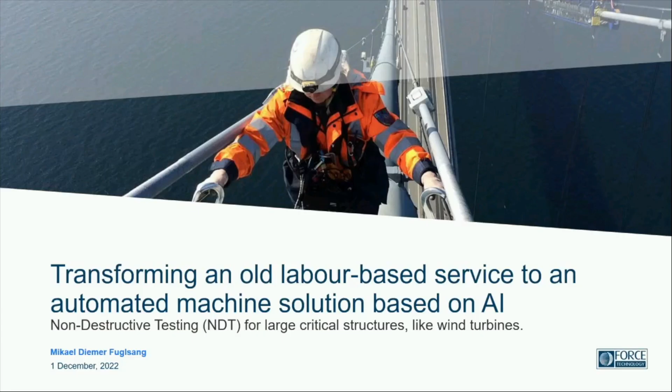I came up with this nice headline some months ago when I was asked to do a presentation about what we do at Force. The last couple of weeks when I've been looking at it, I've found out that it was quite a huge topic of transforming an old labor-based service into an automated machine solution based on AI. So I'll skip through some of it because it will be history and probably a little bit boring, and give you some examples of what we are doing. Please, if there's something that is not clear when we are done, ask a lot of questions, and I can try to answer as good as possible.

A little bit about me, Mikael Fuglsang. I'm a Master of Engineering from DTU, mechanical. I took my bachelor in what is called nanotechnology, physics and nanotechnology, and now I've been working with Force on and off for the last 10 years. First as NDT inspection, where I was head of our subsea inspections, and the last 5 years I've been working in our digital innovation, and now it's digital service because we transformed it from just innovation to service. I've just turned team lead for our robotics team at Force. Due to my background in mechanics, I'm not the one doing all the code, I'm the one making things come together and work.

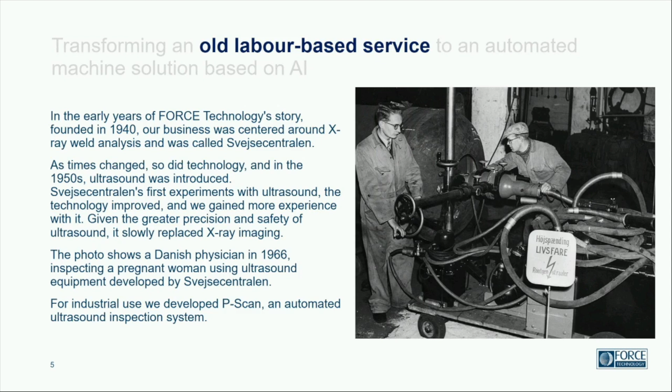So, old labor-based service, what is that? Force actually started back in the 1940s, where the first welding was introduced in Denmark, and service was based around X-ray of welds. Then in the 50s, we had ultrasonics, and in the 60s, they started using ultrasonic for, if you know, if you've been a woman, a female, pregnant, you've done ultrasonic scanning. That was kind of where it started at Force. Force technology produced equipment for Gentofte Hospital to do ultrasonic scanning, originally of pigs in slaughterhouses, but it turned out the technology was also used on women.

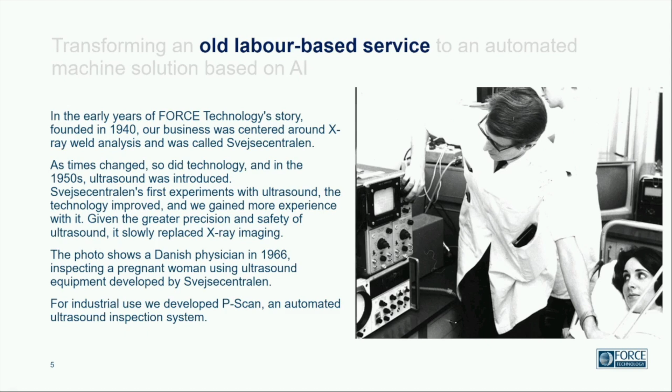And for industrial use, we have our P-scan solution. So labor-based service, ultrasonic NDT, is a labor-based service. It's a man going with ultrasonic equipment and doing an inspection. He's actually trained to do the movement on the probe at the same time as he actually looks for the signal on the screen.

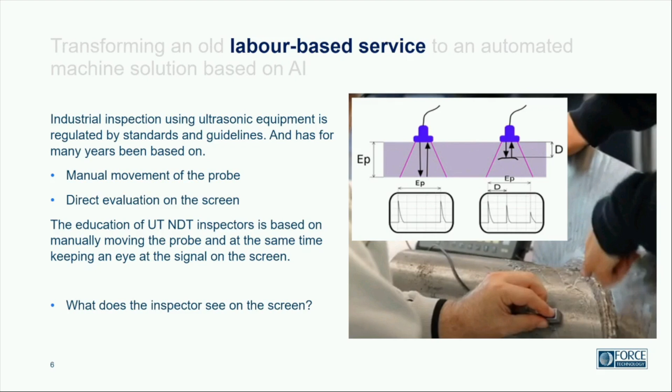So what is he looking for? He's looking for peaks in the ultrasonic response. We have ultrasound coming into the material, there's some geometry, and it reflects back. If there are occasions where you have defects in the material, you'll see a peak from that. So he's moving the probe around on the surface while he's looking at the screen, kind of cross-eyed, holding on to the little probe, moving it so that he gets a nice movement to inspect this weld all the way around while looking at the screen, seeing if there are small pop-ups.

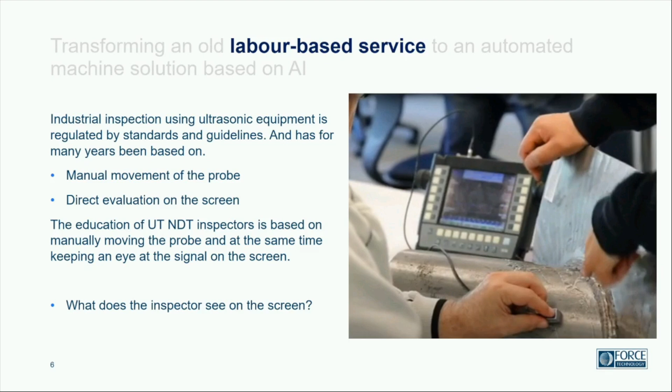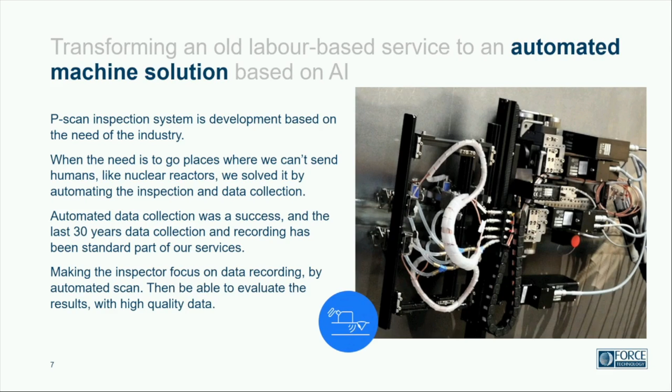But we have places where we can't send humans. So for the last 30 years we have been developing scanners and scanner solutions to send into areas where we can't send humans, for instance nuclear reactors, deep sea, underwater, places like that. This turns out to be a very, very good solution, because now we can collect data from the probes, record it, and look at the data afterwards. When we have high quality data, we can also do machine learning on it, so we can use AI to evaluate the data. Just have some examples of where we are using this.

The divers are still there to place the scanners, because this was shallow water. In other places we use ROVs, but they will dive down and put the scanner on. So they don't have to be qualified NDT inspectors to do the job. They just put the scanner on and we will control everything from the top side and evaluate the data.

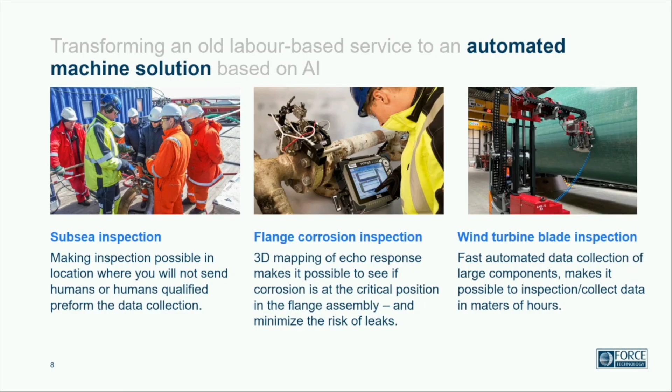And lastly, we build large scanners for wind turbine blades to make fast inspections. So we can make inspections in matter of hours instead of days. So if you are to do the new blades, which are 115 meters long, manually going around with a probe, looking at the screen, it takes days. And with this, we do it in hours. And we record the data.

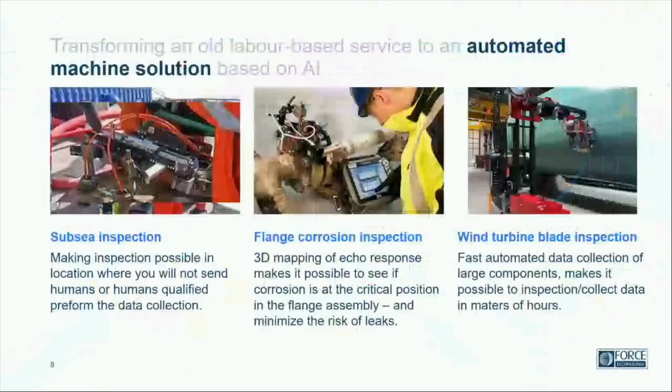So one of our big fields right now is wind energy. It's not that this can't be used anywhere else. It's just that we have a large focus for wind energy at the moment. And that's both in monitoring and in NDT.

And we have a big margin of the market of blade inspection. So almost all the big suppliers of wind turbine blades use our equipment for scanning the blades in production.

AI. So how do we define AI? Probably all of you know that we have AI, and in AI we have something called machine learning, and inside that we have deep learning. So there is a gradient of how complex is your problem.

One of the features that are very significant for a human trained to evaluate ultrasonic data, it's image recognition. They look at the image, they look at the screen, and they recognize when something is out of the ordinary. Our brain and eyes are very good at understanding the pattern that we see and seeing if something is out of the ordinary. And we have reasoning.

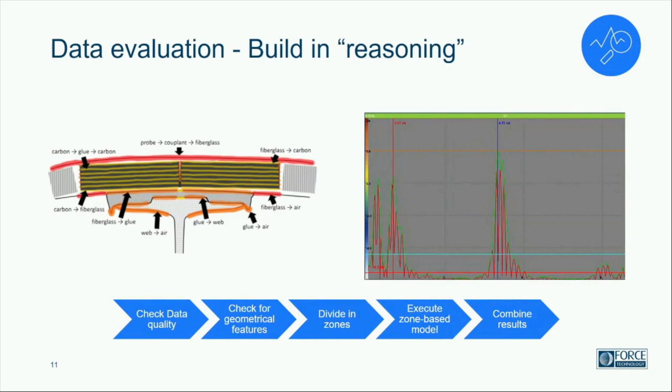We have a customer that has 6 production lines. They're using 40 NDT people to run this production line and make sure the quality of carbon profiles, the ones used in the blades, are high quality and that production is actually going as intended. They have enough orders to double their production capacity, but they can't find skilled people. So what do they do? They come to us and ask if we can help build a solution for real-time evaluation so they can continue scaling their factory.

What we did was invent this machine, and on the other side there are some ultrasonic probes, and in this cabinet is everything that is needed. Everything is boxed in because carbon fiber dust is quite critical to electronic components, so everything is IP classed.

What we found was, when we did the SAT, the site acceptance test, they wanted us to simulate, or we were supposed to get the same result as their inspectors, but we had a difference. Everything from that master coil they made for us was cut up, ground down, and destructively tested to see where we disagreed. It actually came out that their manual inspectors only found 50% of the defects. Just with the settings we found for this machine to begin with, we got 80%, and now we've fine-tuned the algorithm and we're turning out 95% of the defects.

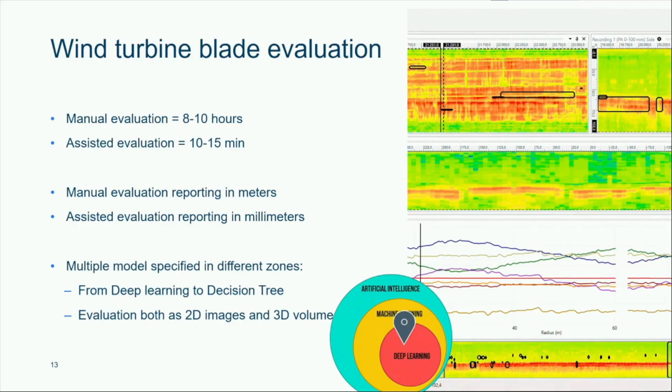And if we come a bit away from the blades, we have projects running on hybrid tests for the future. So instead of replacing the inspector they're using during data collection with a permanent mounted ultrasonic sensor, then we can do monitoring.

We can analyze the data in the cloud using AI and get automated tracking of changes over time. This can be used for corrosion or crack growth. And then we can compare the results that we are getting with our digital twin.

And we are working on accelerating the CFD and the FEA analysis by machine learning for these applications, so that we can actually not only compare the two, but actually run the model to predict when we are going to have a failure. Or we can give a time estimate on what to do to prevent the failure.

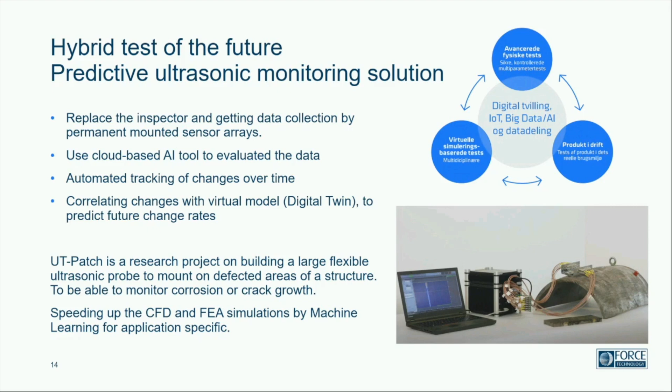Because in case of corrosion, if you have fluid moving through a pipe, it will corrode inside at some rate. But if you change the flow rate, it will erode at a different rate.

So we are using autonomous drone flights, flying in confined spaces, flying in places where you can't see the drone, for in-service inspection. Now we have the model for analyzing the ultrasonic signal and using it at the factory before the blades leave the factory.

In the future, the blades are mounted on turbines, and we want to do the same kind of inspection to make sure that the small defects in there haven't grown, and that we keep track of the condition of the blades. So drone flights, different ways of collecting data from the blades in service.

So offshore blades and things like that. We have different projects on that. We have fast ultrasonic weld inspection. We have huge metal structures that are coming up to support these turbines, both onshore but also offshore, especially the monopiles being bashed into the sea. We want to inspect the welds of those faster.

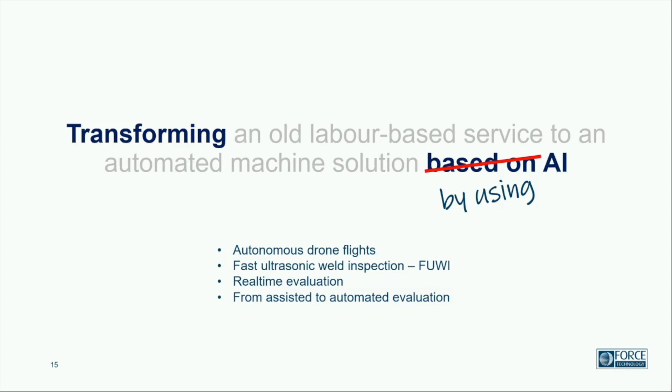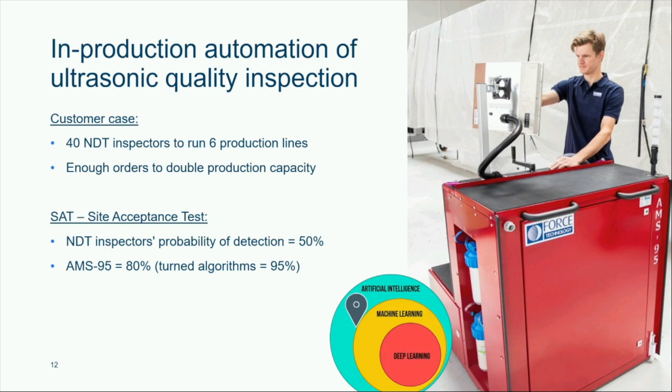Okay, thank you, so there's no yet threshold to detect and give an alarm or something. That's what we're doing in this machine. Actually, this machine has a light, a green light, and a red light that detects the data quality is low, so there's missing water or something went wrong in the production that makes the machine not collect data. And we have a yellow light that lights up every time there's a defect, so they can see it on the factory floor lighting up, and see it on the screen, sent directly to the control room. They have a control room with all 6 production lines up and running, where they can see where they have defects happening, and go adjust production parameters to mitigate.

Okay, thank you very much. I think Tim is satisfied, and after I have another question from Tiberiu Yuan. What type of neural net architecture are you using for 3D scans? What type of neural networks? Oh, that's a bit beyond my competences.

We are using, at the moment I can't remember exactly, we are using TensorFlow for the 3D analysis, a lot of the 3D analysis where we are analyzing the data, both in 2D for the image analysis, then 3D for things that are volumetric, and then we go into 1D analyzing a single A-scan to get information as well.